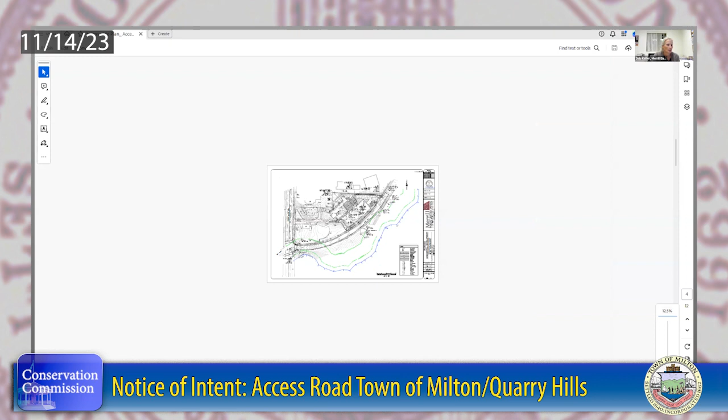So we are tying our discharge point into where the existing head wall is for the cross culvert, so that we maintain that location and not create a new one. It is slightly within the 25-foot setback from the wetlands, but it is in the same location as the existing head wall is currently.

I would note that I looked this evening and did not see a DEP file number as of yet. And there is habitat located on the town property, so we have submitted to Natural Heritage and are awaiting any input or response from them as well.

I'm happy to answer any other questions if I haven't touched upon anything.

Yeah, Deb, I have a question, but Tom Palmer, you may know the answer right off the top of your head. I know that Natural Heritage has some land that has been at issue in the past, going back to when the town was trying to put up a wind turbine. I think there was one section that was deemed to be sensitive to Indian artifacts. There was, I forget what the name of it, Tom. You know the name of the area, don't you? Whether it's something quarry. Do you know what I'm talking about?

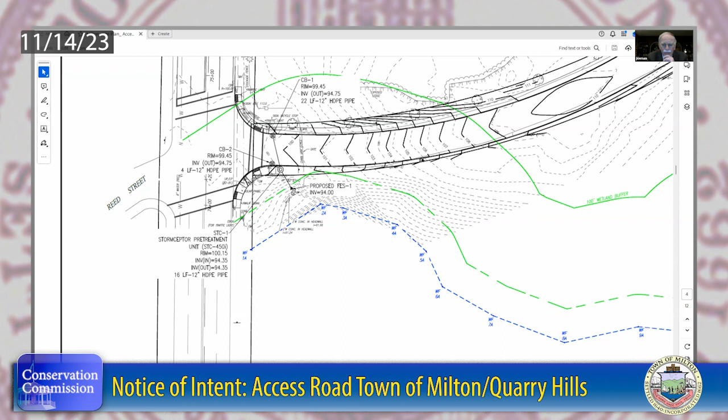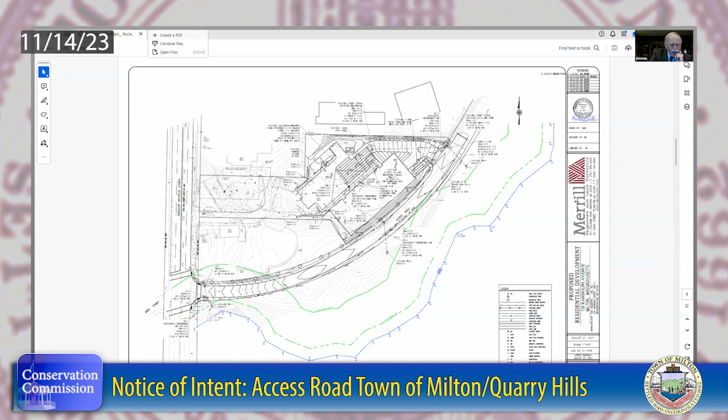Rob C, you're on mute, I think. You're on mute. You're still on mute, I think. Yeah, he's on mute. You're off now. Good, go ahead, Rob. Nope. All right, I can't see. Are there any other hands while Rob tries to work with his audio? None visible, Mr. Chairman, no, I can't see any with the screen sharing up there. Oh, I will get rid of that. Where my... come on. I know, Rob, you put something on the chat, but I don't know what it is. Oh, there we go, stop share. So there. Thank you, Deb. Now I've lost... no, there you are. Still can't hear anything, Rob.

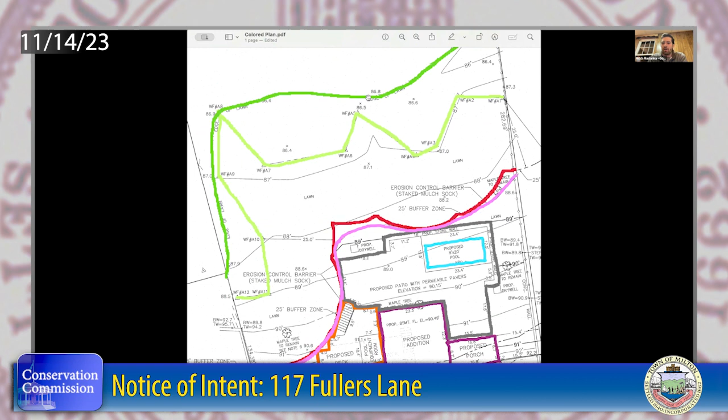So this faint green line, that's our new wetland boundary, and this darker green line, that's the edge of lawn. So we have edge of lawn, and then we have the wetland boundary extending into the lawn there. That pushed our 25-foot no-disturb buffer zone closer to the house, which added some site constraints for the proposed project. Initially, we did have a deck already creeping into the 25-foot buffer zone, so it pushed the buffer zone even closer to the house. So the proposed deck was reconfigured to stay outside of the 25-foot buffer zone. That was one of the commission's main concerns, making sure no proposed work or structures were within the 25-foot buffer zone.

So we had the architect look at the plans and discuss with the homeowner, Patrick, on what they could potentially do to redesign their deck and additions and patio space to stay outside that 25-foot buffer zone. And this is what they've come up with.

They have a proposed deck shown in orange here that's been reconfigured so that it's outside the 25-foot buffer zone. Nothing's changed with the garage, the front addition, this addition, or the porch. The patio space did need to be shifted back closer to the house. The pool was reconfigured. So overall, less disturbance in the buffer zone and no more disturbance within the 25-foot buffer zone.

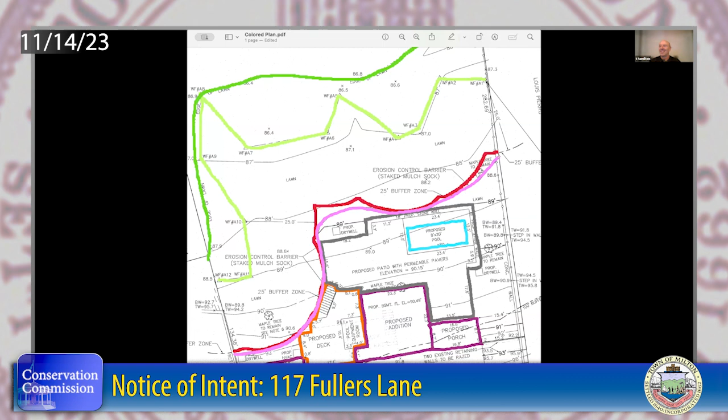Hearing none, we go to the vote. Arthur Doyle, how do you vote? Yes. Wendy Carpo, how do you vote? Yes. Todd Hamilton, how do you vote? Yes. Tom Palmer, how do you vote? Aye. And John Kiernan, I vote yes as well.

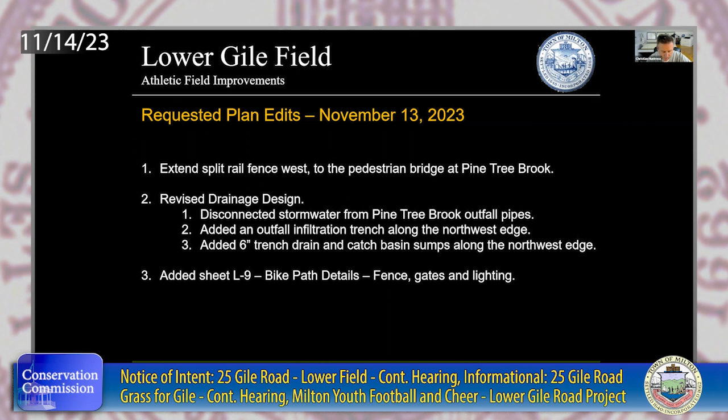So this is the updated layout and materials plan. The field is outlined in the rectangle that you see here. Lower Gile comes in from the left-hand side and moves in a westerly direction down to the southwest corner of the field here.

So the extension of the fence is the first thing. We had previously had the fence right here at the 200-foot riverfront, right at the edge of pavement. At the Conservation Commission's request, we now extended that all the way down to the pedestrian bridge that goes across Pine Tree Brook, to prohibit parking within this grassy edge, this kind of meadow area that's off the edge of the gravel drive. So we've extended that down in that direction. That's really the only major change to this layout plan.

And then the drainage plan - this plan is where we probably did most of our edits. I'll zoom in just a minute, but what we're going to focus on is this edge along here, this long edge where my cursor is now.

This is the northwest edge of the field, and the field tips at 1% with a cross slope from a high point over on this side down to a low point on the far side here at elevation 38, right along this edge. This is a cross section - detail 2 is a cross section through that edge. So what this represents is, I'm going to see if I can zoom in on that just a little bit.

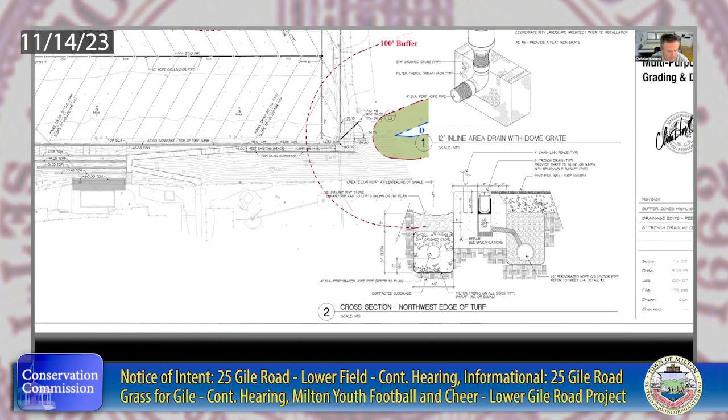So this is a blow up of that, and I apologize for the amount of detail on here, but I'll go through it and certainly answer any questions that folks may have. So the field really drains in 2 halves. There's the upper half of the field here. Again, the high point is down at the bottom of the screen here,

and it pitches at 1% across and to the northwest. So this half of the field, if rainwater were to fall in this half of the field, it would migrate through the turf itself, through the resilient shock pad and the filter fabric, and down into the stone base, and then either migrate along the top of the stone base or get collected into the panel drains. There would be infiltration that we would expect at that point. It would then collect into this midfield collector here, and there's a high point right in the middle.

So it would travel this way. If it was over here, it would come in and travel this way, and then down and across the northwest edge through this collector pipe and into an infiltration trench along this edge. And that's going to handle - I'm sorry, if it fell on this side, it would do the inverse of that and just come over this way and down and around. So this entire field becomes subsurface storage and can handle storm events. And I'll let John go through what those storm events are.

But that's how we encourage infiltration and how we store stormwater during really any other major events. What we've done that's different now is we've added, and you can see it here, there's a red line - a trench drain. It starts in the upper right corner and comes all the way across. This is that black graded drain you saw.

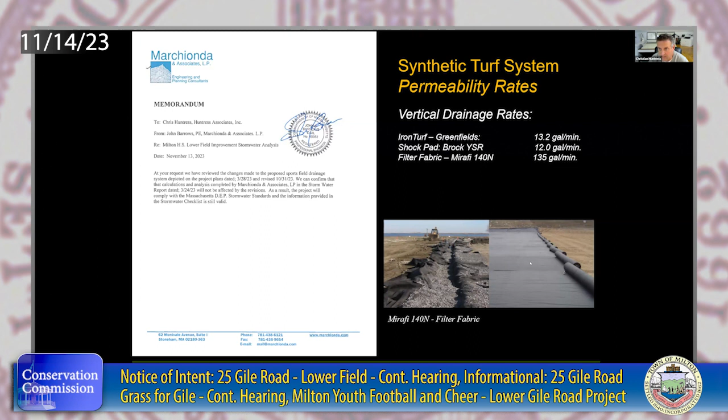For water in this storm system to get to the point where it would top back out of that infiltration trench, out the riprap, and begin to weep into the wetland, it would have to pass through at least 3 layers of this Mirafi filter fabric - so it would be cleaned 3 times before it actually exited the site.

And this is sheet 9, L9, the bike path construction details. We did add an access gate. This access gate will be located in 2 locations. Well, there'll be 2 gates.

One will be at the top of Gile Road that will limit traffic being able to travel down into Gile Road. You can open it when you need it, or if emergency vehicles or maintenance vehicles need to get down, but there will be controlled access at the top of Gile Road.

And then a smaller version of the same gate, Mr. Chair, down by the bridge. You asked that we provide an opening through the extension of that split rail fence for maintenance access down in that location. So we included that gate in those locations as well.

You can see here we've just assembled details that were on other plans. We've taken them now and put them all onto this one sheet so they're easier to reference. We've got the split rail cedar fence, the gate details 2 and 3, the bike path paving detail, and then the light fixture detail, pole base, and electric conduit raceways for the pedestrian scale lighting that'll be along that path as well.

The balance of the presentation, Mr. Chair, is really just a summary of all the plans, the most updated plans that we've submitted. I'll go through them quickly.

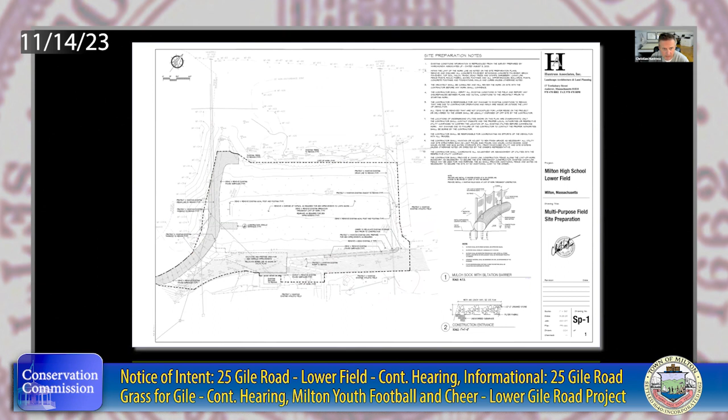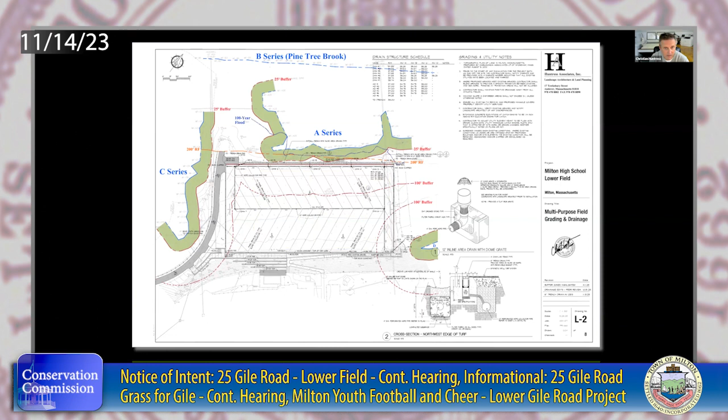This is site prep, tells us how we'll break the site down as we begin construction. This is the layout materials plan that I presented earlier with the extended split rail fence. This is our updated grading and drainage plan that we just discussed.

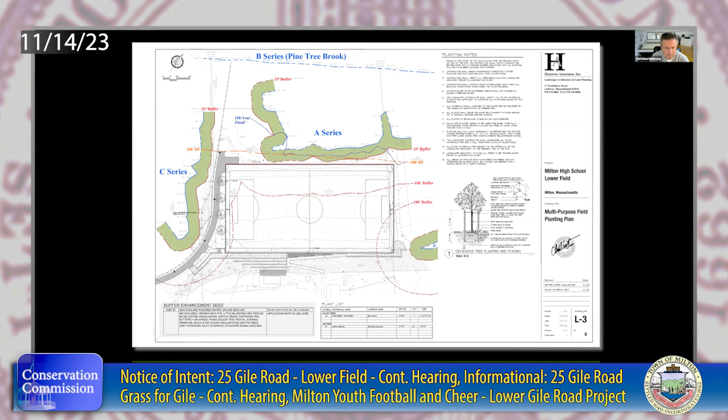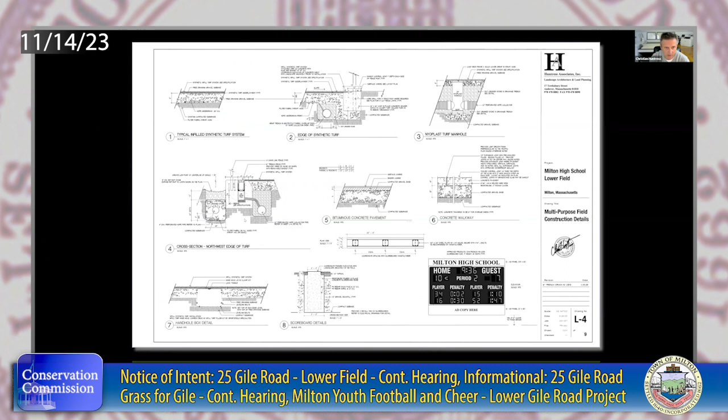Landscape plan, there have been no material changes or edits to the overall landscape plan. Construction details, sheet L4, there were no significant changes here with the exception of detail 4, which again mirrors the cross-section through the edge of the turf shown on L2. L5 is construction details for the synthetic turf field, mostly field layout and sports dimensions.

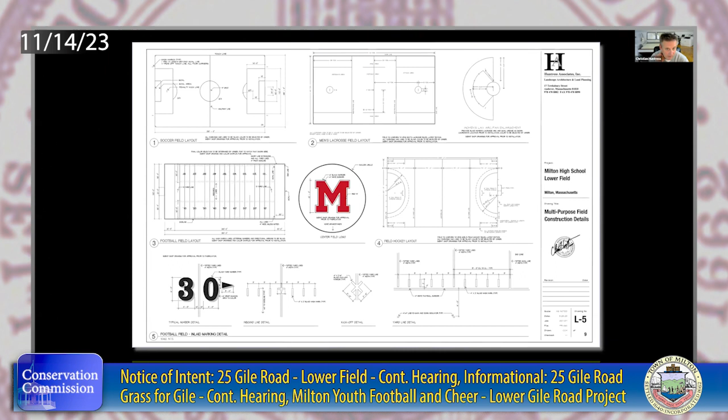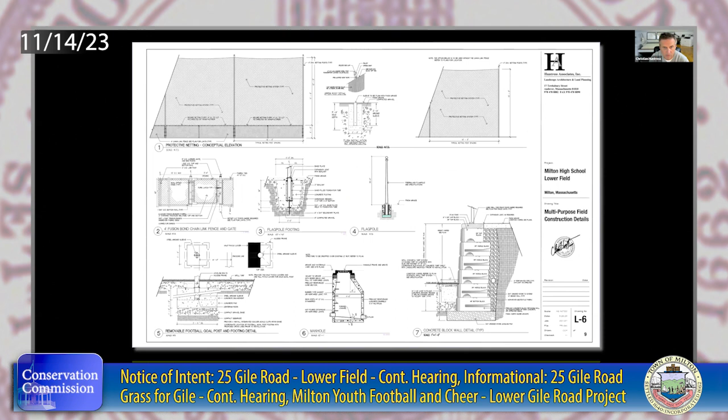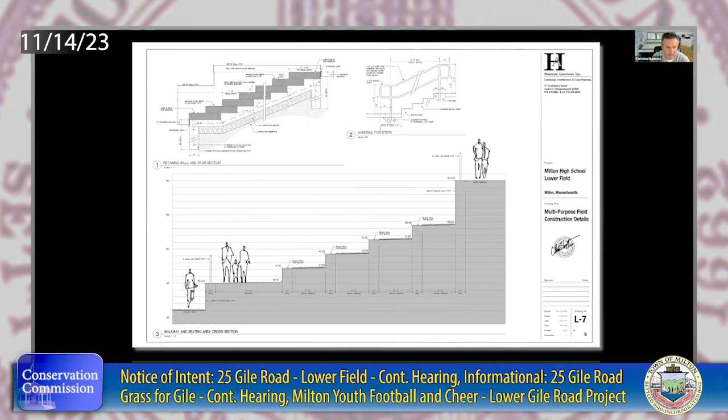L6, again, multi-purpose field details for perimeter fencing, safety netting, retaining walls and the like, goalposts, a few other things. L7 is a cross-section through the terrace seating that will be built into the hill along the eastern, southeastern edge of the site, and some stairway and handrail details.

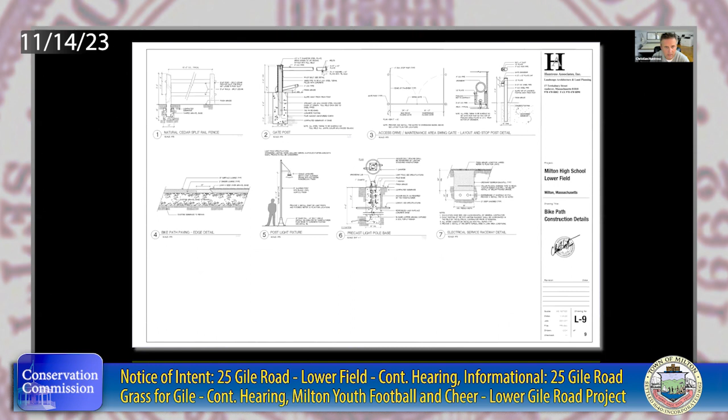L8, the proposed sports lighting, photometric plan, and layout locations. And then L9, again, the bike path details.

A couple of quick images of what we expect the finished product to look like. This would be in the seating area looking down towards the bike path, and you can see that we've added and extended the split rail fence down this edge as well. And then overall kind of looking back down and over at the site.

So with that, Mr. Chair, I can stop here. I can stop sharing screen, or I can leave it up for a little bit if the commission has questions. Some of the questions might refer you back, so why don't you leave it there temporarily? Thank you very much for that presentation. Commission members, any questions?

I have a question, Mr. Kiernan. Of course, go ahead. Mr. Huntress, could you please go into detail about

What is necessary as far as an operation and maintenance plan for the town, particularly with respect to the new additions of the drainage trench and the, what did you call them, the little catch basins for the particulates.

The area drain, sure. As part of our stormwater report, I'll hold up here, which was submitted originally back in March, in the back few pages include an operation and maintenance plan, long-term pollution prevention plan, for post-construction stormwater controls, and that includes a lot of things, but there's a summary of maintenance requirements, and I'll just read those quickly for you.

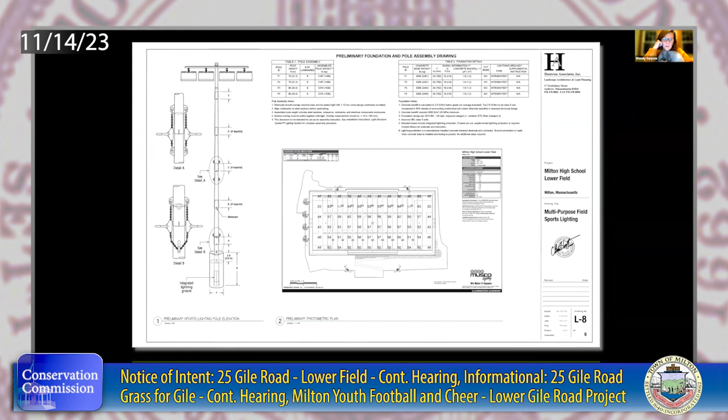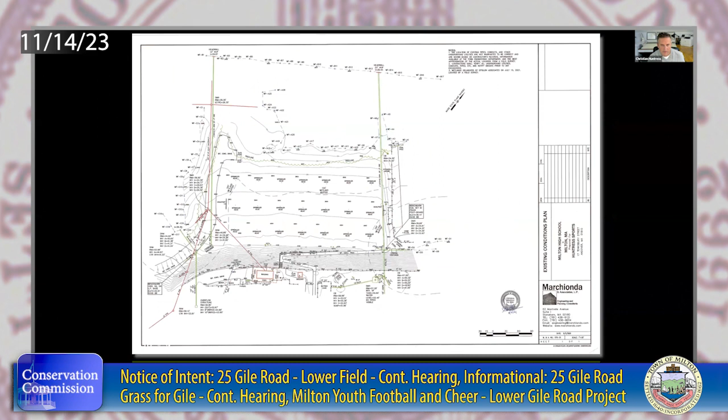So what would happen in the event that the town is unable to keep up with the operation and maintenance plan? Let me get back to the drainage plan.

It's really not that complicated a system. Everything under the field itself is a closed system, meaning only stormwater can get into the subsurface drainage system under the body of the turf, because it has to pass through multiple layers of filter fabric to get down into there.

So you're not going to get contaminants or debris necessarily in the subsurface drainage system or the pipes underneath the turf field. The trench drain that runs along this edge could get filled with leaves or debris, but you could easily pop it and clean the entire thing the whole way along.

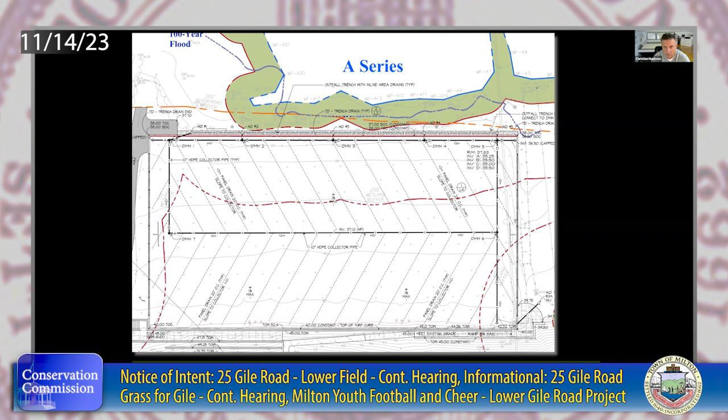The only area that may require more maintenance would be this infiltration trench on the outside of the field. I'm going to go to the detail — that might be easier to see. That would be on the outside of the field here with the perforated pipe.

This whole trench works as an outfall system for the drainage system in a larger storm event. Stormwater would come into these area drains, leach into this, fill, and then seep or back up to the point where it would exit out the top of this riprap and into the wetland system. This is about 2 feet higher than the 100-year flood elevation.

The contour actually grades away from this, so this would be the only thing that might require any real maintenance over time. That may just require you to look at vegetative growth, leaves, or other debris on top of the riprap that may otherwise inhibit infiltration, but I don't think it's significant.

Did I answer your question?

Well, I suppose, in my mind, this seems kind of similar to the gutters on your house. If the gutters are clogged up with leaves, they're not going to operate the way they need to in order to keep water off your house and prevent ice dams and flooding in your basement and everything else.

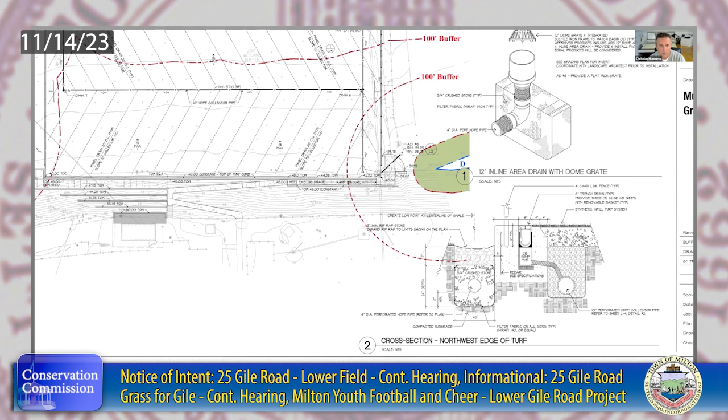So where it would fail would be right here in this trench drain, and you would see that along the entirety of its edge. I'm just going to go to the next screen here, bear with me a second.

It would be this trench drain that would fill with debris. This is the only way that I can think of how this drainage system might fail or where a failure would be. It would be that nobody ever cleans this trench drain and it clogs, and nobody ever comes in and cleans out these sumps, and it would back up through this system.

I don't expect you're going to have overland flow here, but if you did have overland flow in a condition when this trench was filled, it would top over this wall and go into this infiltration trench, and then again go into the ground through here.

It might help to hear from John Barros. We can ask John to speak for a little bit about the intensity of the storm events that are captured through this system, and when we might expect to see outfall coming into these different pipe systems. John, are you here with us and available?

I'm here, yes. I just want to add one thing about the O&M. The O&M requires that logs be filled out and submitted. I would imagine they could be required to be submitted to the DPW. So it's not something that would just be forgotten about if it's done properly. There should be somebody filling out a form quarterly, and submitted back to the appropriate person at town hall. So it's not something that would just be forgotten about, I guess, is what I'm trying to say.

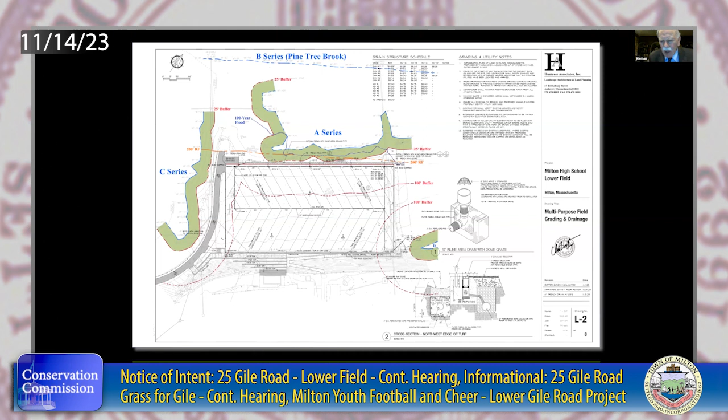Hey John, can I ask you something? You've mentioned pervious surface a couple of times, and the commission had asked for a sample of at least the shock pad component of it. I know Philip Driscoll's got a copy of it, but is that something you've got, or Philip, can you share that? When you say pervious, I'd like to take a look at what you're talking about.

Chris, you must have something with the cross section of the materials of the field. No, we actually got a sample today. Philip, are you able to put that picture you shared? Let me see, hold on, this might take a minute. I might be able to find it. It's probably easier for you to find it, Chris.

Tom Palmer, you're pretty good at sharing. Did you get the picture from Philip this afternoon? Yeah, I did, I could open that email and take a look. I just found it. You got it, Chris? You got it.

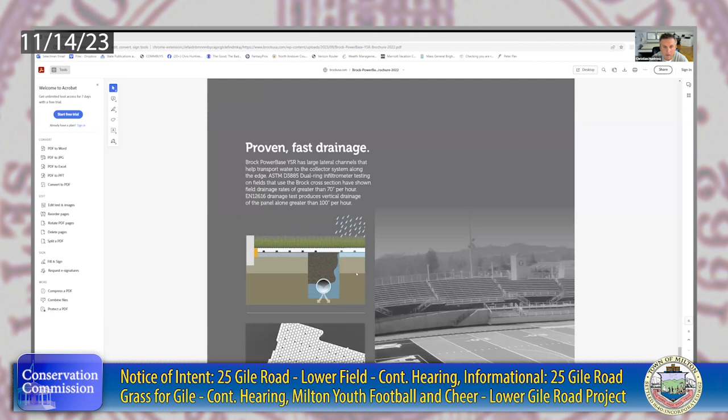Let's see if they've got... yeah, they're showing how it works there a little bit. The photo that Philip had actually shows it up close, and you can see those holes in it where the water drains.

As far as our calculations, we made the assumption that the water would penetrate through the components of the field into the existing subsurface, into the gravels below it, and then into the existing subsoils, which would infiltrate. All right, thank you very much.

Let me shift gears a little bit, because I know there are some folks that would like to be heard. But Sean Reardon, I think it was your original suggestion that the water be diverted from the pipe into the wetland area in this trench drain. Do you, or Ron Myrick from the hydrological perspective and Sean from the engineering perspective, does this do what you suggested?

Yeah, the proposed trench drain, most importantly, puts the wetland in the 25-foot no disturb zone between Pine Tree Brook and the project. So basically, the old solution had a direct connection to the infrastructure, so it would just be like the express lane to Pine Tree Brook. Whereas now we're interceding that connection by 200 feet of wetland and 25 feet of vegetated buffer. So huge benefit there.

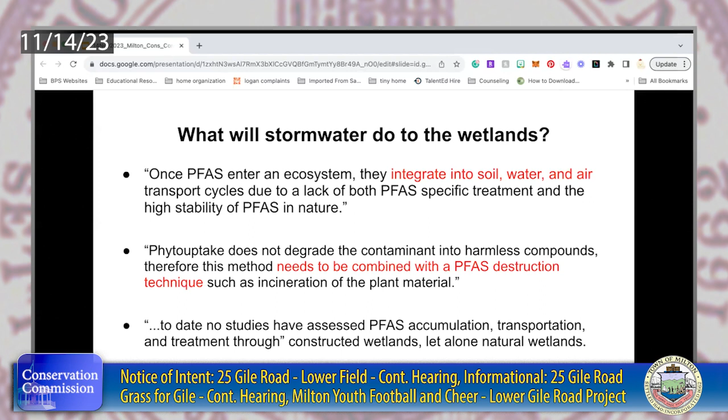Phytouptake does not degrade the contaminant into harmless compounds. Therefore, this method needs to be combined with a PFAS destruction technique, such as incineration of the plant material. In other words, any plants that do take up the PFAS and filter it out, as you say, are now contaminated—now hazardous waste—and they don't just stay there. They will continuously recycle back into the environment. To date, no studies have assessed PFAS accumulation, transportation, and treatment through constructed wetlands, let alone natural wetlands. You are a guinea pig here.

Continuing this, the temperature of stormwater runoff is of emerging concern. Increased runoff temperatures are a serious threat to aquatic health—these are quotes from peer-reviewed scientific articles. It is not possible that this water will cool down to ambient temperature before it runs off into the wetlands, as the videos Kate showed indicated. The storms we're getting with climate change are more dramatic, with more water—these rain bombs, bomb cyclones, whatever you want to call them—put a lot of water down in a short period. There will be sheet runoff off these fields that can reach 180 degrees or higher. If you think this won't change the temperature of the brook, you need to rethink that.

Thermally polluted urban runoff can subsequently cause stream temperatures to surpass threshold temperatures, resulting in sublethal and lethal effects to downstream ecosystems. You have a cold water fishery, and this increase in temperature is not going to be good. Dissolved oxygen concentrations are directly related to water temperature—in other words, you're going to lose dissolved oxygen in those streams because of the heat, and that is going to be bad for the entire aquatic ecosystem.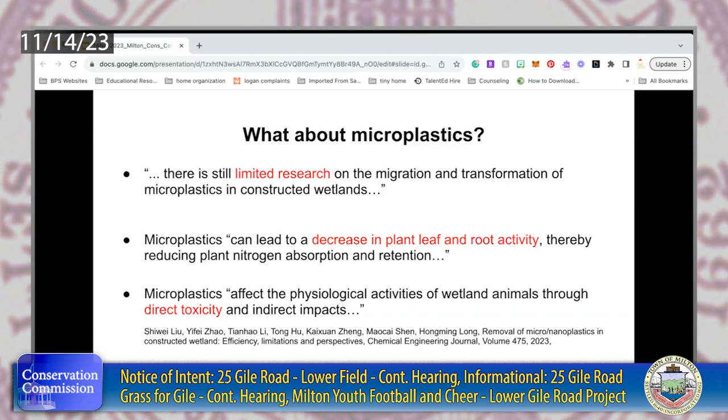Filter is not destruction. Filter is not a cure. Filter means it gets taken up—it can get bound up in the soil, in the plant roots, in the plants themselves, which can then kill your forest, according to this new article. Microplastics affect the physiological activities of wetland animals through direct toxicity and indirect impacts. Remember, each little microplastic is a little toxic bomb filled with PFAS and other toxic chemicals that will impact not only your plant life, but your animal life.

Next slide, please. The wetlands will not destroy, filter, or remove PFAS. The current knowledge of PFAS removal in wetlands is still in its infancy. The ability of microbes in wetlands to mineralize PFAS is limited. The uptake of PFOS by trees would require 48,000 years to 160,000 years, depending on which type of tree you're talking about. And with the fall of forest foliage, PFAS can reach the forest soil—so if your trees do take up some of this PFAS, in the fall, when those leaves fall down onto the ground, they're going to get into the soil, into the wetland, and into the stream.

And if that's not an alteration, I don't know what is. Next slide, please.

The absence of evidence is not the same thing as evidence of absence. Because there are such limited studies on the fate of microplastics and PFAS in natural forested wetlands, and because we do know that the water leaving the field can adversely impact the brook and the fish, we can't just assume everything is going to be okay. You can't just say it's going to be filtered, DPW can clean these out, and everything is going to be fine, because that's not the way life really works. You need proof in order to prove. The burden, as Kate said in the first slide, is on the applicant to prove that this harm is not going to occur. It is not your burden to prove that it won't.

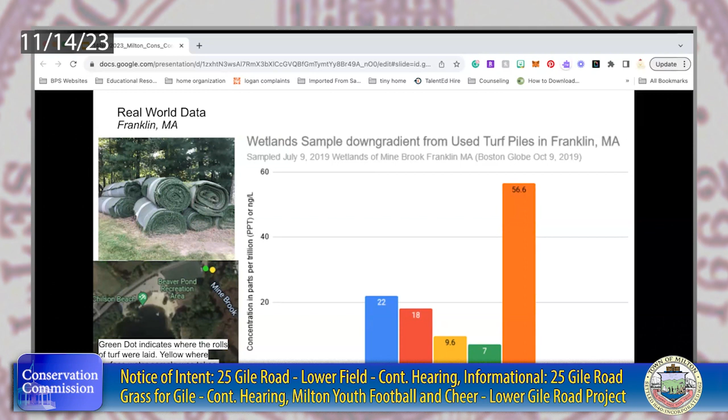When you analyze the effect of PFAS on aquatic organisms, particularly zebrafish, you find that when a pregnant zebrafish mom is in PFAS water, the eggs developing inside the embryo in that mother fish are denatured by the PFAS. So every exposed pregnant fish exposes 3 generations, and these chemicals accumulate in the environment and recycle, just like Dr. Bennett said.

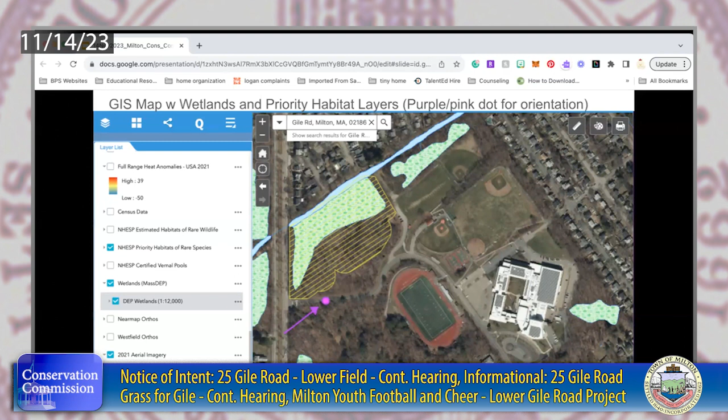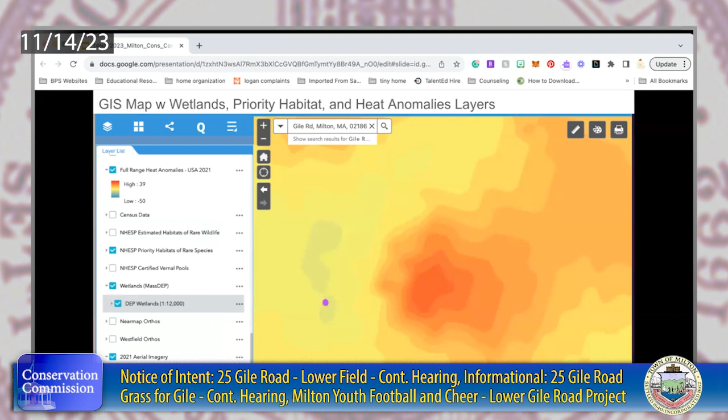This is your heat anomalies. You'll notice that all that wetland area and the brook is where it's not so hot.

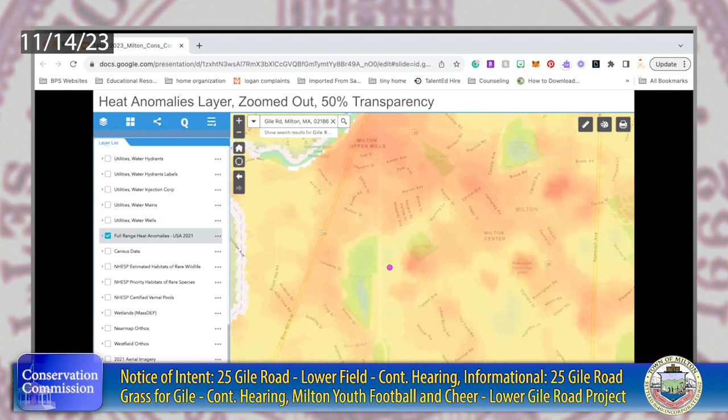Next slide, please. So this is with the heat anomalies reduced to 50% transparency so you can see underneath it, and zoomed way out so that you can see more of Milton. Next slide, please.

So this is heat severity over that first map. If you rip up the grass that's above that red-orange patch underneath the wetlands on the right-hand side, and replace it with plastic, you're going to move that red closer to the wetlands.

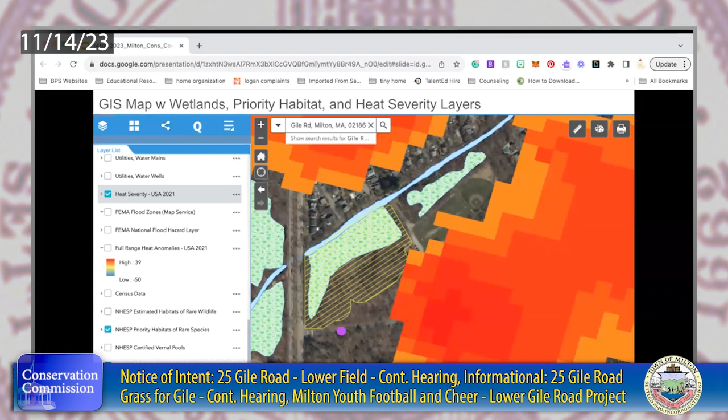Next slide, please. So this is zoomed out again so that you can see how it affects the rest. That is your little patch of not so hot in Milton, right? That's your little patch of coolness where that water is.

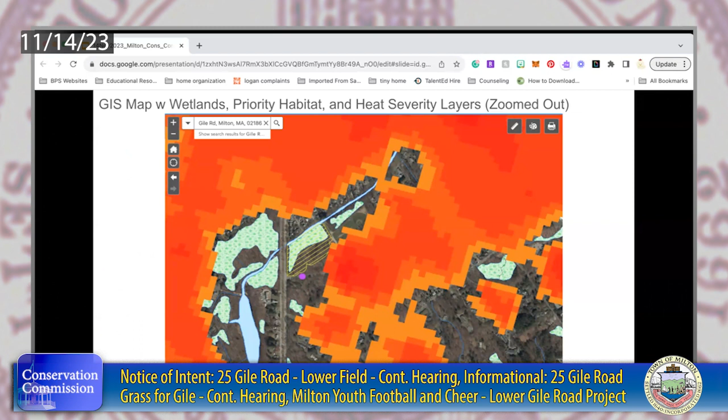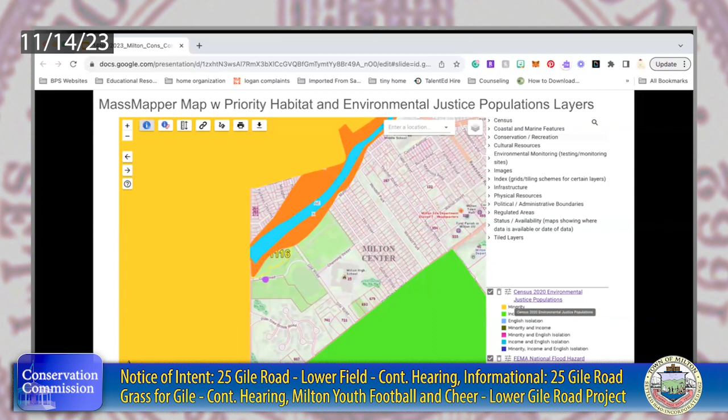And I believe that's the last slide. So that's it for me. I'm happy to take any questions. And of course, you can reach me by email or text or phone.

Thank you, Kristen, thank you very much. That was very articulate. Paul, you finishing? Paul, you're muted. Paul, you're - we can't hear you, Paul.